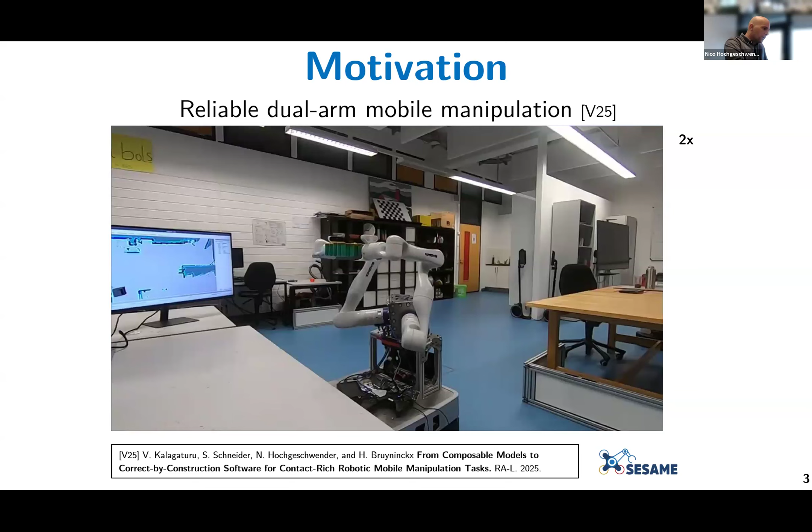Then it aligns to the table with the end effectors, and then lifts up the battery cells and delivers them to a safe place to finish the burning. So I think that's a nice application. We are all interested in this kind of application. But as you already saw in this scenario, this is, of course, not a real product. Possibly in the future that will become a product, but it remains in a laboratory situation. So we are in a laboratory environment where we have this low TRL.

TRL stands for technology readiness level, which was introduced by NASA many years ago to rank technologies and innovations and to have some maturity level. So is it fundamental research? Is it already prototyped? And demonstrating a method in a laboratory environment is better than nothing, but it's not yet the TRL which we want to achieve. And in order to demonstrate this low TRL, typically we would perform a single demonstration, maybe multiple demonstrations, but it is a single task, single robot kind of setting.

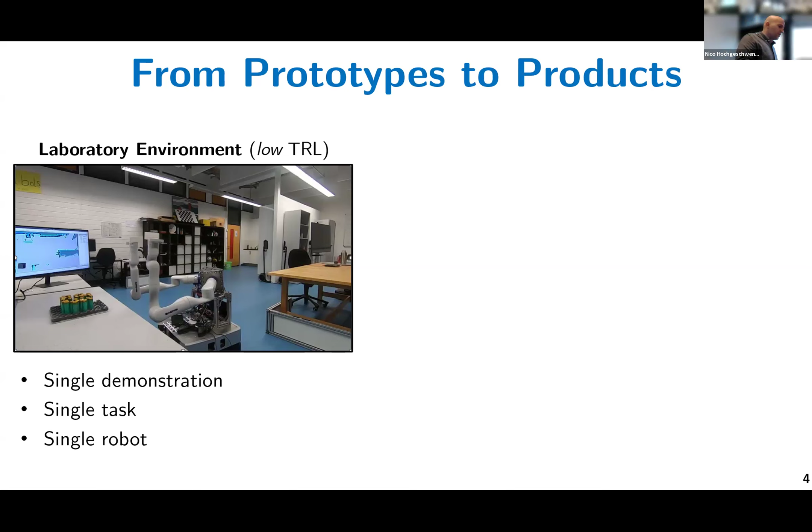But ultimately, what we actually want is to deploy the system into the field. So that we go into the real factory environment where, by definition, there are different constraints. That is the operational environment. So deploying the system into the field would imply that we have a higher TRL. But in such a situation, obviously, we are more interested in a higher maturity of the technology because we are thinking also in terms of long-term deployment.

So we want this robot to be robustly and reliably operating over a long period of time. That basically means that the service which the robot provides, namely lifting these battery cells and bringing them to a safe place, is constantly delivered. We are also interested in a variety of tasks and possibly also the collaboration or cooperation with robots and humans.

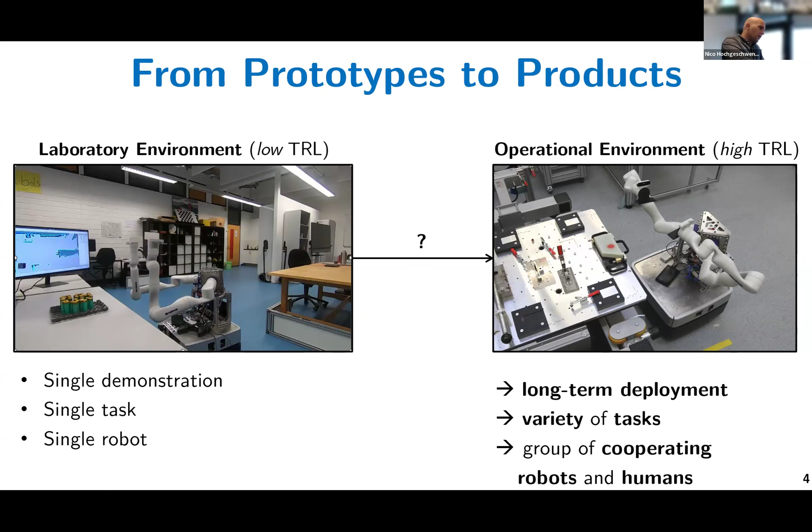And you see here, there's an arrow from the laboratory environment to the operational environment, and there's a question mark. And in order to answer this question mark, in order to go from this low TRL to this high TRL, we need to provide evidences, which are required to move from the lab prototypes into this reliable and safe setting.

Okay, but the situation is obviously that this is not one-way, one direction. It is, in fact, a very agile setting where we go from the lab environment to an operational environment and we actually go back. So this is bidirectional by definition, because in the operational environment, we will see that certain things are not working, certain capabilities are not rich enough, or even new technology which is not developed in our lab, but somewhere else, has been developed and needs to be integrated, and that would be the case where we would actually test this in a lower TRL setting.

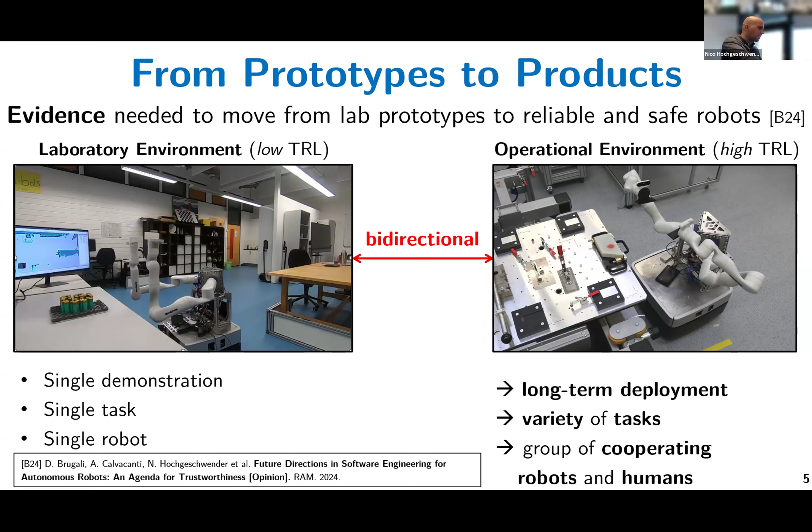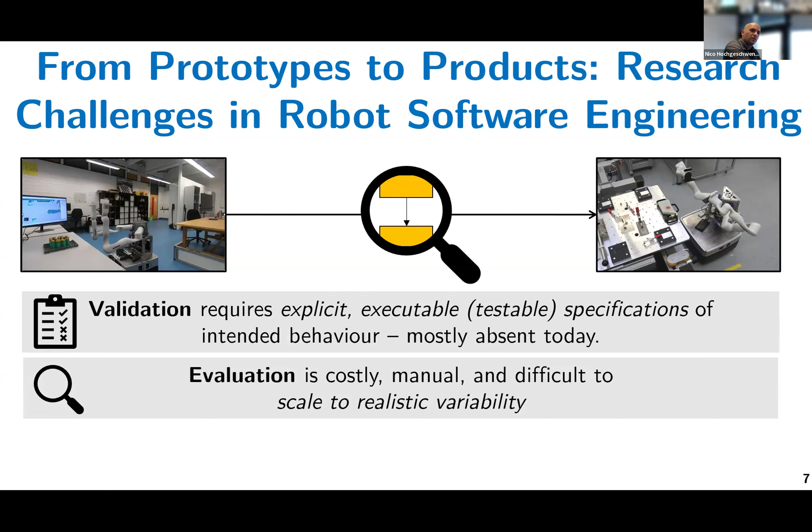The second thing is evaluation. We want to make statements about how good something is. And this should be exactly where we collect evidences and draw conclusions, and this is typically done through a lot of variability, different kinds of scenarios, different kinds of settings, where we can also draw some statistical conclusions. Because very often we have an assumption about how something will work, but just in the field, by trying it out in several configurations, several trials, we get a better understanding of that behavior.

And then the third thing is that these are important activities. This is also done. But in order to really scale that, we need to have automation in place. So we need to have automation which goes along the validation and evaluation cycles and makes these possible, that we have machines or setups where certain parts of this validation and evaluation can be actually performed in an automated manner, on the one hand due to the size and scale of the problem, but also due to the capabilities and resources which we actually have. So here automation is a key component to move forward.

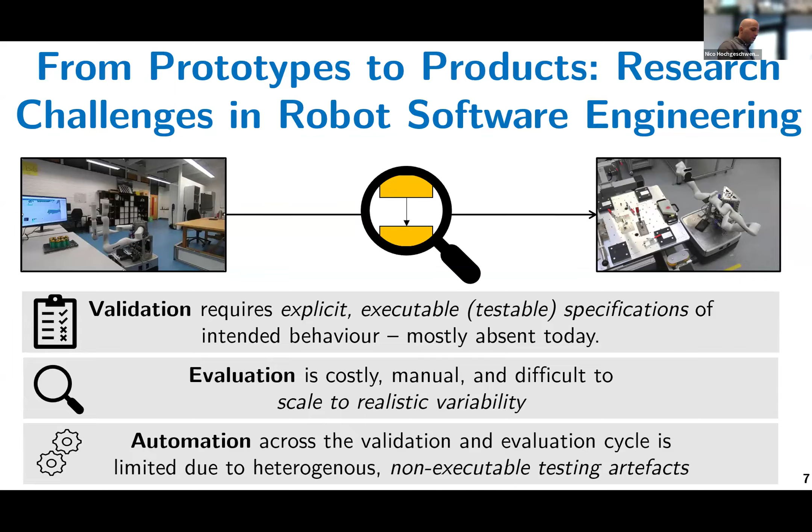Okay, having said that, let me now introduce you to an approach which we call scenario-based validation and evaluation of cognitive robots, which tries to provide a methodology to actually carry out this validation and evaluation in an automated manner. And to do so, let me introduce you to another real-world case study. So there was a time, there was COVID. Maybe some of you remember.

And in my former institution, we had a startup company developing mobile robot platforms, omnidirectional mobile platforms, as you see here on the picture. And of course, COVID also was a time of many opportunities. And there was the time where one thought that COVID is spread through contact infections. And as we know from other diseases, if you expose certain surfaces to UVC light with a different intensity, depending on the surface characteristic, of course, you can significantly reduce the amount of viruses and bacteria on surfaces.

So the idea for this company was to take their mobile robot platform, put some UVC lamps on it, and deploy such a system in public environments, things like healthcare facilities, nursing homes, kindergartens, schools, etc., to perform disinfection missions. So what does this mean? The robot is located somewhere in the building where there's a charging station. The robot navigates to a specific target location and then follows a certain disinfection route.

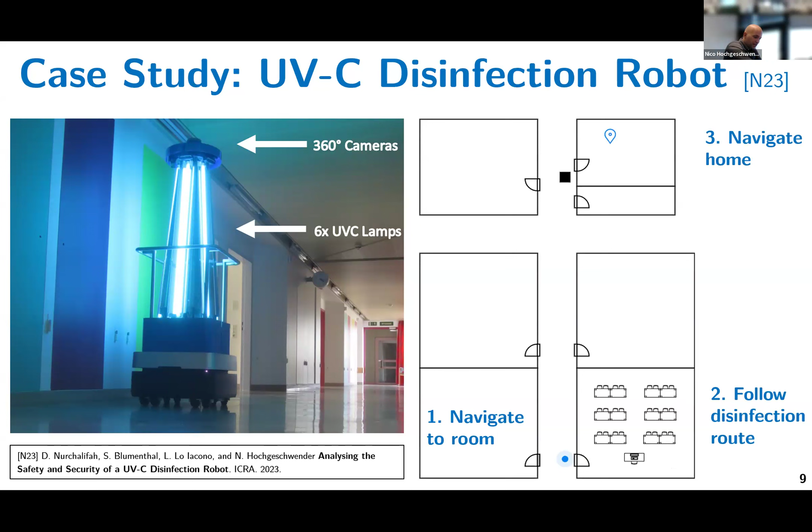So in essence, this is a rather simple waypoint following task, but of course the intelligent thing here is: how long should one stop at a certain surface and disinfect it? And then after this task is finished, the robot would navigate home. Okay, so in such a setting, we need to answer a very important question, namely, how do we know that this robot is safe to deploy?

And safety here has actually two dimensions. The first dimension is that UVC light is dangerous for humans. The idea is to deploy this robot in a human-populated environment, such as a hospital or a nursing home. The robot might operate just at night, but also during the day. If there are people around during the day, the robot should not expose the UVC light to humans, at least not for a very long period. So we need to make sure that there's people detection in place, and that we have mechanisms to turn the UVC lamps on and off, etc.

But then there's also a second safety-critical dimension that is rooted in the robot mission itself. What does this mean? The robot mission here is safety critical on its own, because there is an assumption that the robot is reliably operating in that environment, that the surfaces are to a certain degree free from viruses and bacteria. So we have a certain quality expectation about how clean that environment is, how contaminated it is. And that is per se critical, because we could then say maybe in such a setting it's fine that vulnerable people are walking around. And if this were not the case, then this would be very critical.

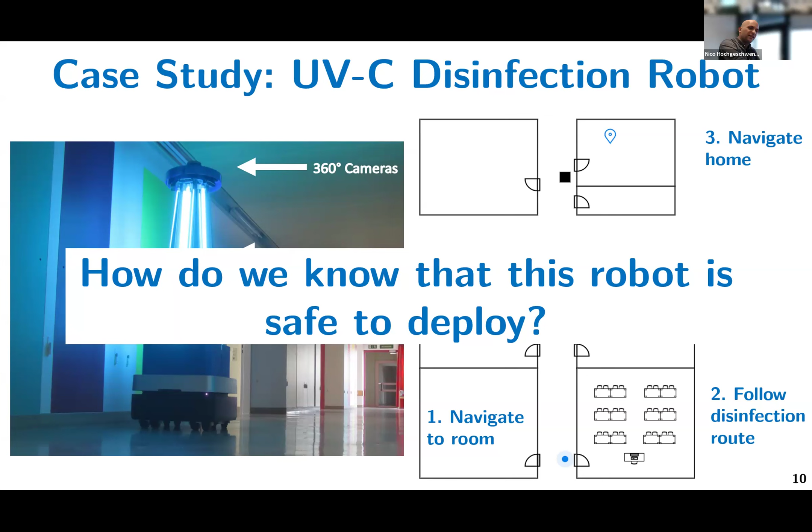Okay, so there are these two dimensions. So during the time when this company actually developed this robot, I observed a very interesting thing, which I thought would be an opportunity to investigate further, right? So the company basically, they were located in one of our labs at the university, and they had an environment where they actually tested the basic capabilities of the robot. So they basically came up with a test environment, which was a real laboratory environment, where they tested the different capabilities of the robot, the disinfection and the navigation and so forth.

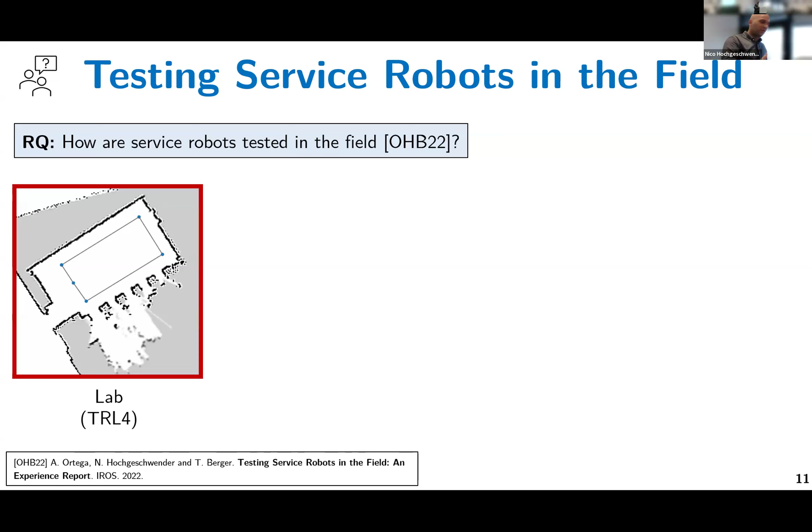And in a first starting point, they tried out certain missions in this small environment, and then at some point they wanted to go to the hospital, and the next step, which was in terms of scale similar to the hospital, was the ground floor of the university, which is a 7,000 square meter environment. And the small red box, what you see here, is actually where the laboratory is located. So we wondered, okay, how do you go now from this laboratory environment to this operational environment, and how do you test the robot really in the field? And apparently that is also a problem for other companies and settings.

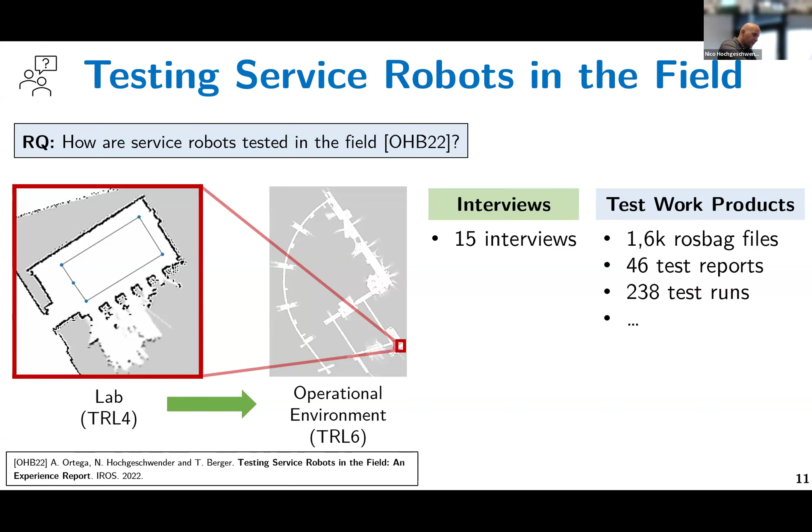So we did an empirical study. We performed interviews with robot software developers about their testing practices in the field. We looked into what are the actual test products which the developers produce. So we looked at the rosbag files, we looked into the GitHub issues, we looked into the test reports, incident reports, test runs, depending on certain configurations, and we looked into these test products. And we tried to identify what are actually the core challenges and what is the state of the practice in performing a field test in robotics. And we derived basically three things.

So what was quite interesting to see is that obviously, through the scale of the environment, it was clear that they cannot test in every location. So what they did in order to deal with this complexity was an explorative test case design. They employed certain partitioning algorithms in order to decompose certain parts, certain characteristics, into environments, and then tried to employ similarity measures like, okay, this looks very similar to another environment, so we don't need to test here again. But even with these ad hoc approaches to dealing with the complexity, there's a significant cost of the testing.

So first of all, from a rather practical side, there are very few means to perform manual traceability. What I mean here with traceability is going from the requirements really to the test results and seeing whether the requirements have been fulfilled. This should be done in a traceable manner, so that I can directly infer which of the requirements have been fulfilled, which have not, etc. And to which degree I have these requirements fulfilled, meaning how many test runs I have performed to test this specific requirement. And there's also a lack of real-world test inputs.

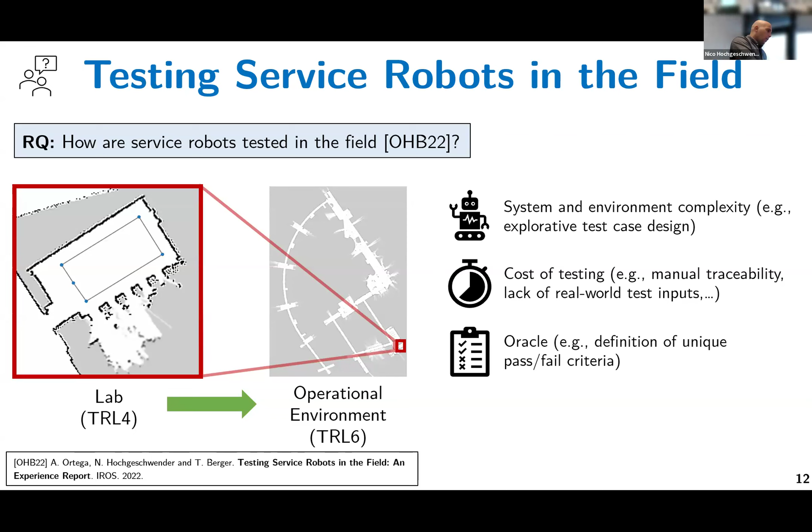And here again, human developer effort is actually required in order to come up with these oracles. And these oracles are in the end computer programs which check the test output for passing or failing. So these are things which still need to be developed by hand. Okay, so taking from this empirical insight, one idea now is that we say, okay, there are actually two dimensions in coming up with these test and validation campaigns. There's the one dimension which is actually the scenario.

So this is the outline, or if you look here on the right-hand side, this is the cover from Romeo and Juliet from Shakespeare. So if you take this analogy in performance arts, an actor would read this outline written by Shakespeare in that case, and it would be a synopsis of the play and a sequence of the possible events when imagined, and an author would write such a scenario, right? Shakespeare, or a robot developer, would actually come up with these scenarios. And then on the other hand, we have the actual agent which executes these scenarios. So in performance art, this would be the actor. But there's an interpretation happening, right?

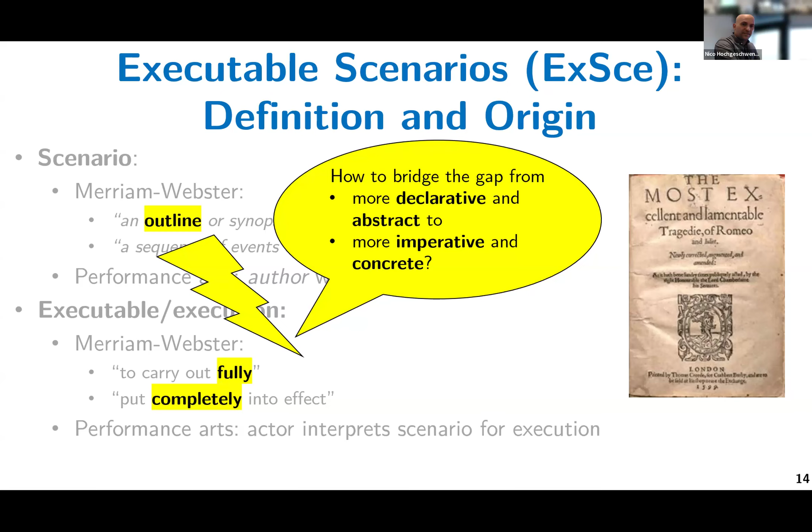So from this outline, which is more declarative and abstract, we have a more imperative and concrete thing. And we asked ourselves, is it possible to provide such a thing also for robotics, and specifically for testing robotic systems? And that is our executable scenario framework or methodology, which basically entails three stages. The first stage is the specification of these scenarios, which should be not only on the declarative side but also on the imperative side, meaning that they are executable. And these scenarios should entail at least three elements: information about the actor, the kind of play or the behavior in the robotic sense, and information about the environment.

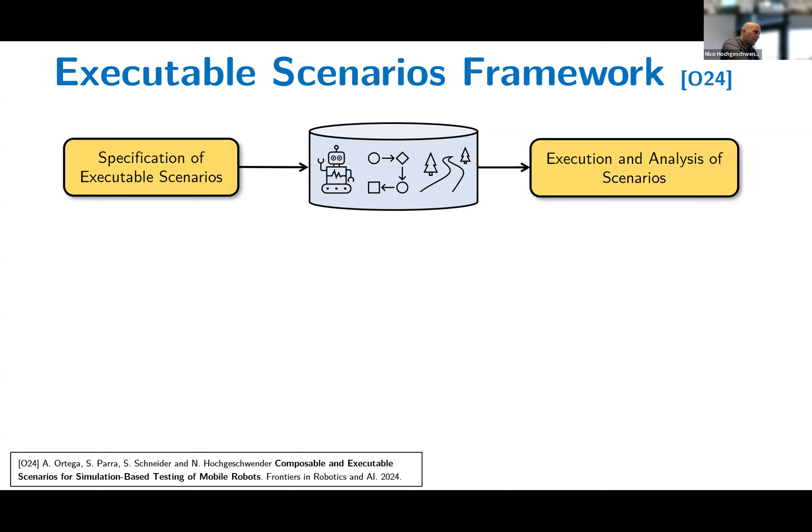And then we have an execution and an analysis stage. But just with the specification of the robot behavior and the environment, we cannot perform any analysis. What is then required are our acceptance criteria. So these are the specification of our pass or fail settings. And having that, we can then bring that together and say, okay, to which degree has this been achieved or not achieved?

And the third stage is then, if we take multiple, and you see this is a feedback loop here, if we have multiple of these executions, we might be able to draw conclusions about the performance of our robotic system. This is then the generalization stage, where we say, okay, we have performed these kinds of scenarios, we have observed the following behavior, and now these are the conclusions which we can draw from it.

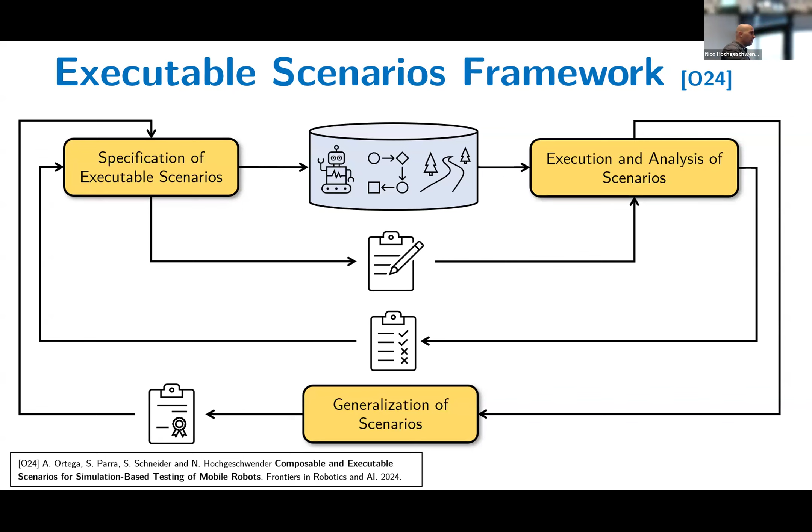Okay, let's have a look how this looks now concretely. I will provide an example from the case of specifying specifically the environment. By just specifying the environment, we can do already interesting things. So based on these interviews, we asked ourselves, how can we actually specify these scenarios? I mentioned already, when it comes to managing environmental complexity, partitioning the environment was another way to handle environmental complexity.

So the developers went to the environment and looked at specific characteristics, as here in the quotation. Characteristics of each area or room allowed developers to deliberately control the difficulty level. Meaning, maybe we start with very simple scenarios or environmental models, and we progressively increase the complexity. In order to do that, there's a specification step, and we developed a domain-specific language. This is our floor plan domain-specific language.

This is a declarative specification language specifically for mobile robots operating in indoor environments. It gives a developer a means to express their environments in a very declarative manner. Having such a model representation, we are then able, through model-to-model generation, to automatically generate artifacts which are necessary for automated simulation. These could be, for example, 3D wall meshes or grid maps, which can be used by the navigation stack of a mobile robot system.

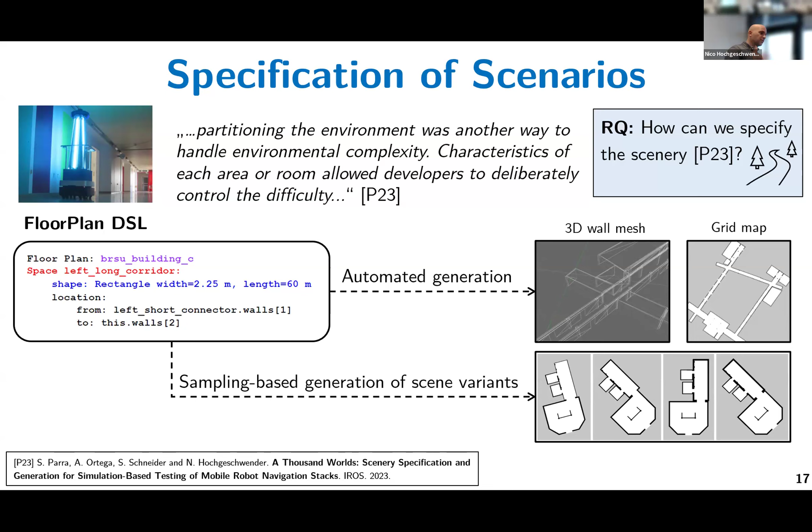We start with a base environment, a base specification, and we can then vary the attributes of certain concepts, but also the composition of concepts. A composition could be, for example, a room next to a room, which is possible in the grammar, and with the sampling approach we could define certain distributions or limits of how many rooms should be next to each other, or to which degree the room is rotated, or the wall width shown in the darker lines. So starting from such a base specification, we can automatically generate more advanced variations of this basic model.

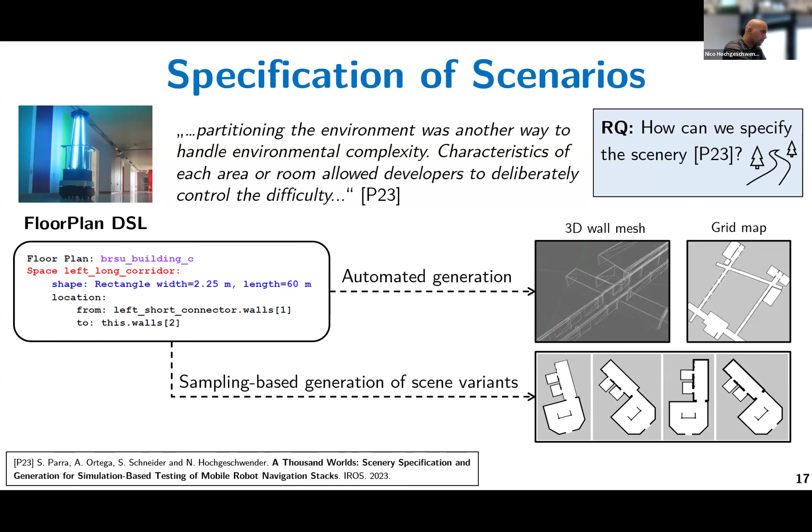Okay, how does this look? On the left-hand side, you see the floor plan concepts which are available. These are rather few concepts. Free space, which is surrounded by walls. Then we have dividers and entryways, which can be interpreted as entryways from one room to another, or windows.

Underlying that, we employ standard geometrical semantics in terms of coordinate transformations, which you all know from TF. Each of these concepts has a location, which is described as a pose, and through pose relations we can then attach different space concepts with each other.

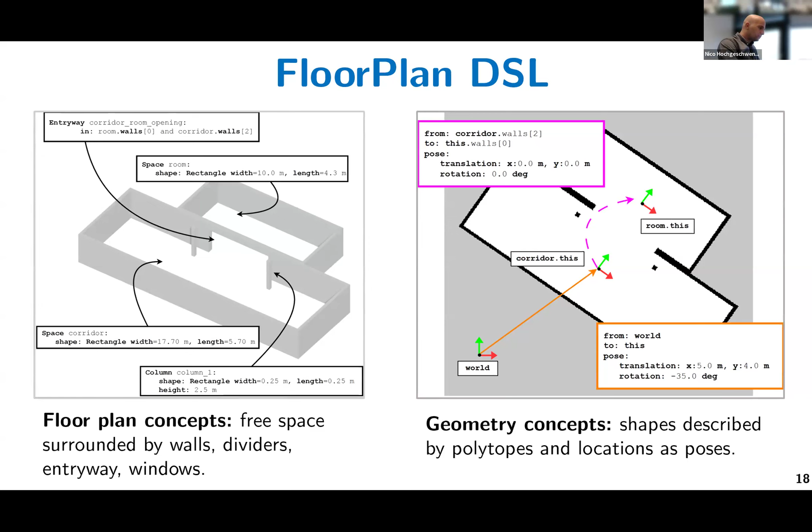Going now from these specifications, we want to actually automatically generate these simulation artifacts or assets. So in the background, you would start as a developer with specifying your environment with this floor plan DSL. You would generate variations, or you would generate just one representative environment. And this is just the front end. In the background, there's a knowledge graph representation, which you can also query.

And this is the representation where we then also generate simulation artifacts such as Gazebo world models for different simulators. So we are currently also supporting or working on supporting Isaac Sim and other simulators. And this is all based on the knowledge graph concepts available in our tooling.

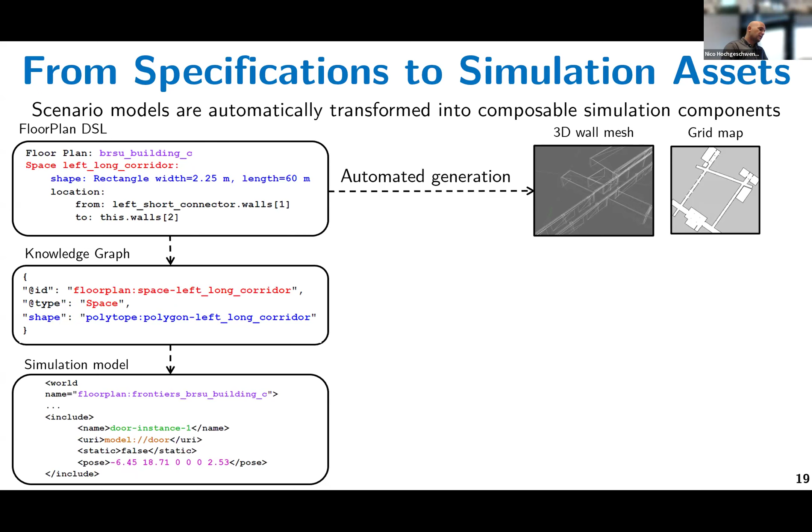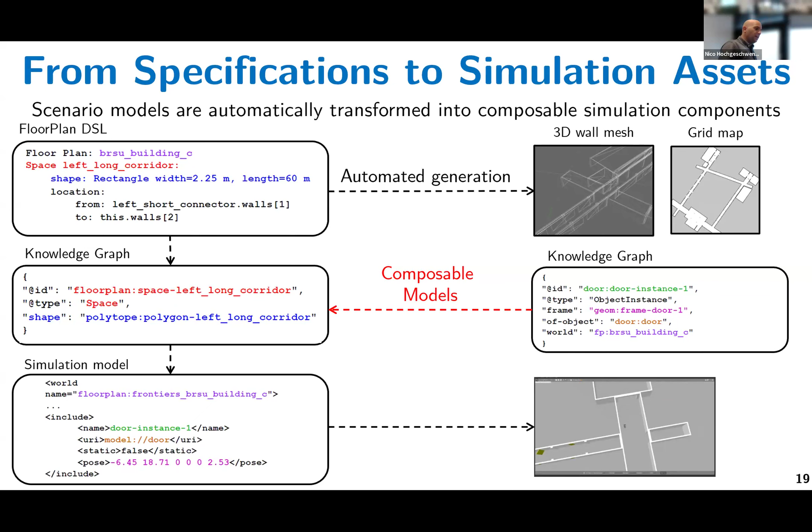The nice thing is that this allows us not only to generate executable artifacts, but also to compose new concepts. So for example, a concept about an articulated object, such as a door, would basically also operate on the pose concepts, which I have introduced before, but would then be a very simple model, which can be arbitrarily composed into an existing floor plan model. And this is how it would look, for example.

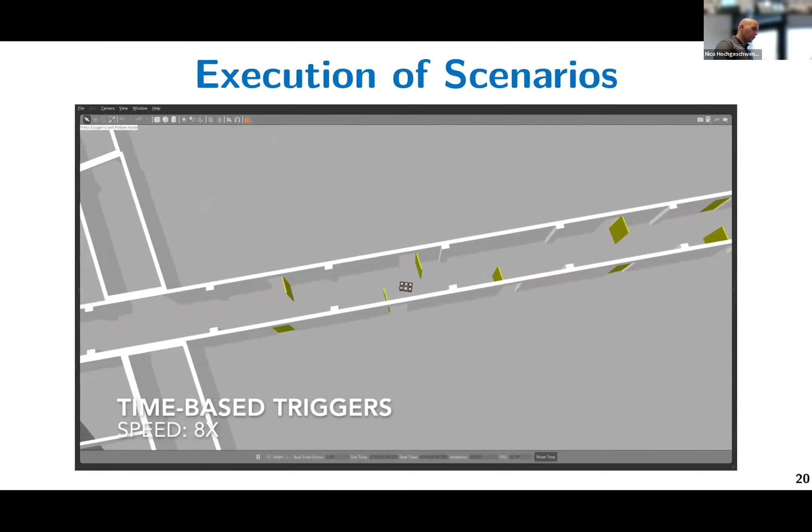So in that case, the robot is just driving through this corridor, and attached to these doors, there's a timing behavior, not related to the robot in that case, where the doors are opening and closing, and the robot needs to avoid that. And that is just by injecting one of these doors, doing quantifications over all of these entryways, and then automatically injecting these articulations into the environment, not by manually putting those things into the environment.

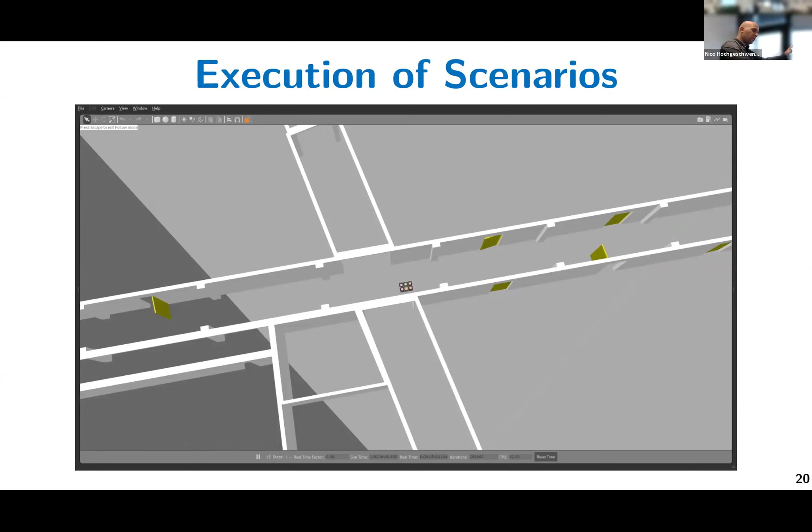What this also allows us to do is to infer higher order relationships between the robot and the environmental features, because this is actually what we are interested in. We are interested in how the robot reacts to situations in the environment. This is a very important thing, and this could be either humans or articulated objects such as doors. And by having this in the knowledge graph representation, we then have a higher order relationship, which basically looks at where the robot actually is, and where, in that case, the door is.

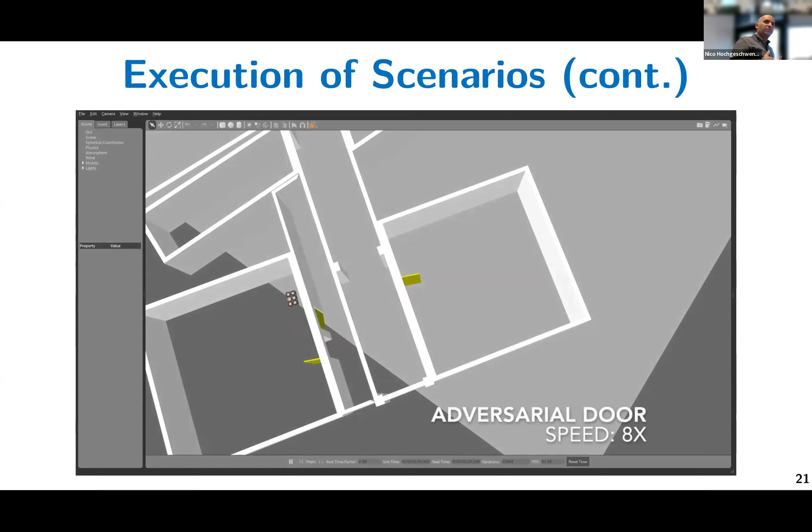And I give you an example here. So on the right-hand side, you see there's a robot in one room, and the task for this robot is to go to the other room. And the other room has two doors. And depending on the navigation system, it will make a plan to go through one of the doors. And in that case, you will see that the first door the robot is approaching is an adversarial door. So it is smashing right before the robot tries to enter the room.

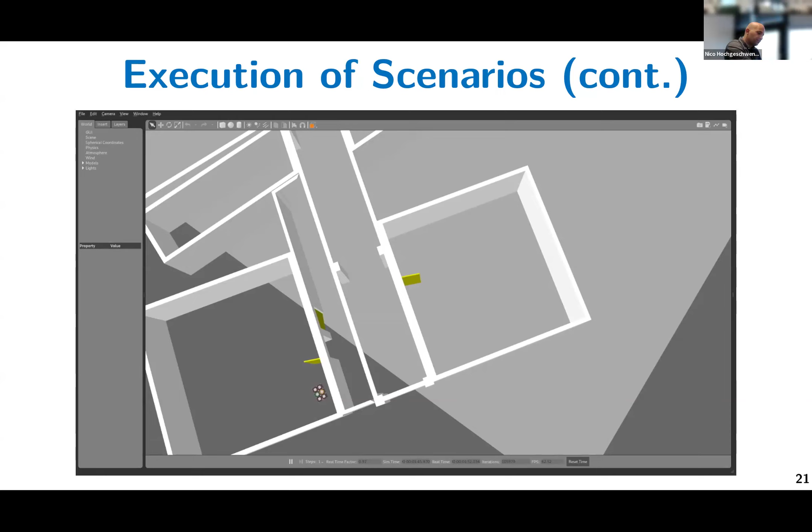And that is achieved through having both a model of the static environment plus the articulated object and the robot, and then being able to actually compose various situations. Okay, so fine, but what does this actually allow us to do now?

Looking at our methodology here, we are able to execute these scenarios, but what we actually want to infer is what the actual acceptance criteria are. When do we know that this specific robot behavior, what you just saw, for example, with the smashing door, is acceptable or not? And this is something where you can try out many different case studies, and I'm going to show you some of those.

I have to admit, if you are working in the field of mobile robot navigation, these insights are not completely new, right? But this now allows you to actually check and validate upfront and be ensured that this is actually also happening in a specific environment, and to learn about the limits of your system. Okay, so that is the question. In order to do that, we need to have the execution in place, as you just saw.

Okay, so let's start with one case study. What we also found out in the interviews was that developers said, normally we first try to develop in a simulator with a recreated model of the target environment. Okay, good enough. But in some cases, this is tedious.

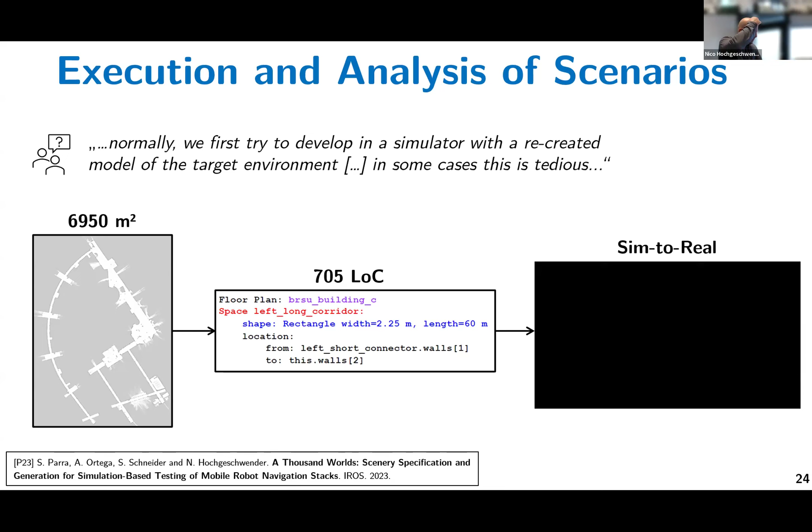And this is nice because we can then use this representation and the generated artifacts to do some kind of sim-to-real test, where we let the robot operate in the real environment, but with the map which we have generated, and vice versa. So this is a nice way to then test this gap.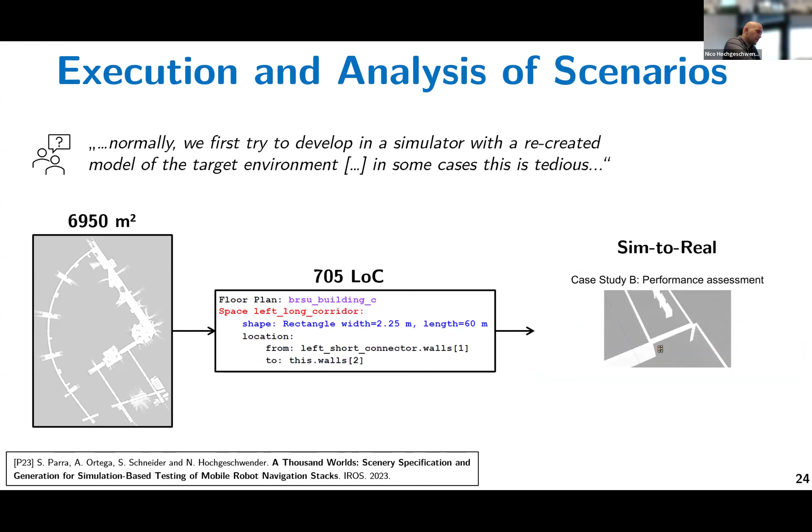Another situation was when you look to the quotes: the worst possible case is a long corridor with repetitive, few distinctive changing features. So this was a quote which we took from the interviews, and we drafted a scenario where we said, okay, we want to have a very repetitive and boring corridor. So with our FloorPlan DSL, it is possible to say, okay, generate me now corridors of arbitrary lengths, for example, starting at a certain length until another length.

And in one of those scenarios, we identified a buggy situation, namely that the Nav2 stack underlying uses a Dijkstra path-finding algorithm to calculate the path. And one of the parameters for the path planning function is the maximum number of cells to be visited before returning the path. But this value is actually hard-coded to be 4 times the number of cells in this created occupancy grid map, and this along the x-axis.

And if a path is not found by then, the function returns an empty path. And this is exactly what you see here. And we identified that bug. In fact, this was an 8-year dormant bug in the move_base local planner. And to validate this, if you just do a coordinate transformation where it's not along the x-axis, where you just switch it, then a path is actually found. So we also made, I think, a bug report to overcome that.

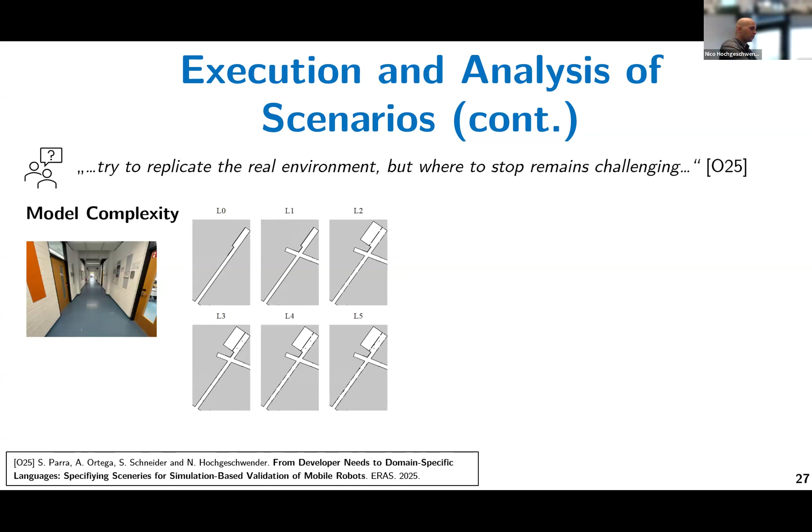If you take this real environment here on the left-hand side, then what you see in the grid maps, I think it's hard to see, but there are various levels of complexity or feature richness of the floor plan model. You can then systematically test the level of complexity you would like to introduce into these models, and relate that in a simulation campaign, for example, with the error and the variance of the pose estimate in each of these different environments. And then you see, for example, that in the first one this is rather high compared to the others.

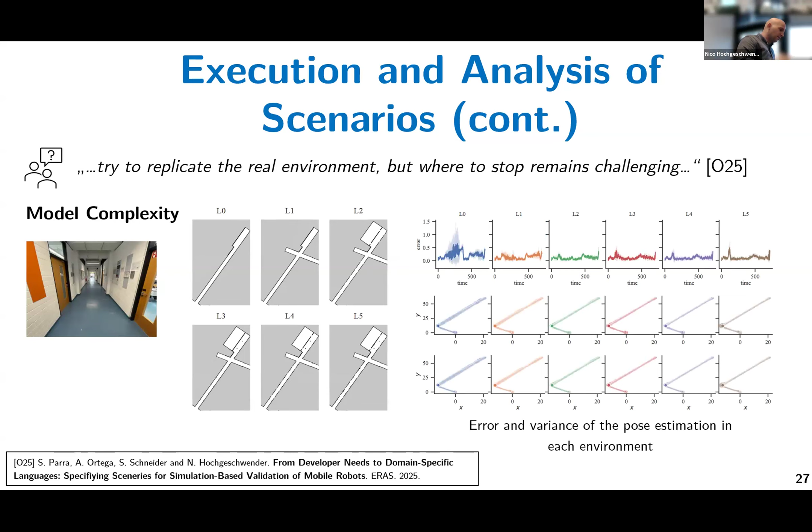Okay, so this was now the case where we do not know the acceptance criteria. This was more in the context of investigating the evaluation part. But there are situations where we actually have a priori defined acceptance criteria, and these sometimes come from robotic standards. What you then want to do is check whether your robot conforms to these standards. That is what is called a conformance testing approach, or adherence of a system to a standard.

What you would basically like to do is say, okay, given a certain robot, I have a requirement: the robot shall adapt locomotion based on a certain terrain type. If you then look to standards, which kind of standards are out there and which of them actually define an evaluation protocol, that basically means how to actually carry out this conformance test, right? The one thing is that I need to adhere to a standard. The other thing is a procedural specification of how I should actually carry that out.

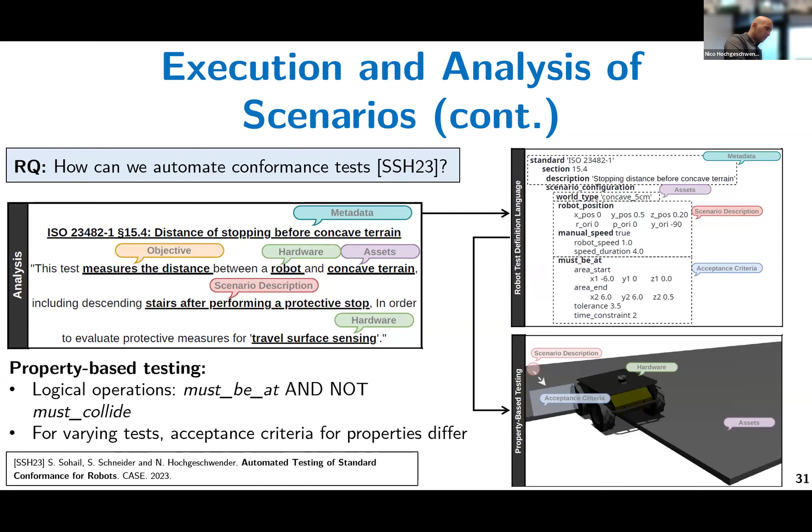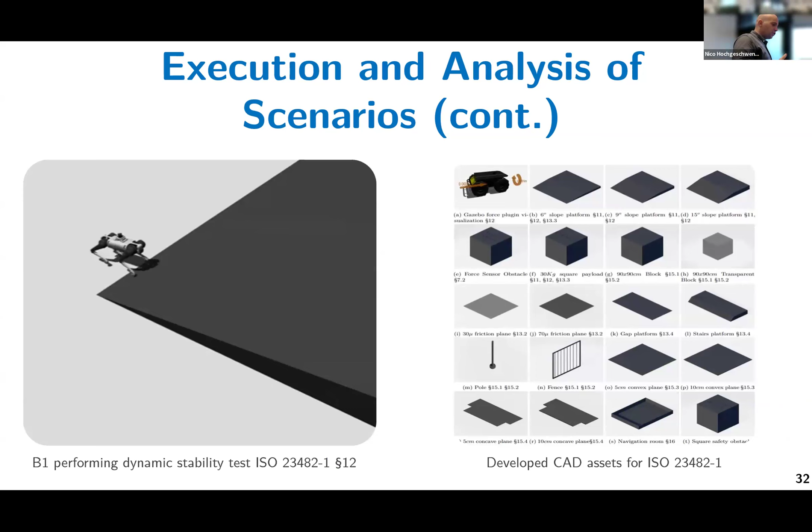And then for the varying tests, of course, the acceptance criteria for these properties differ. So these are then the safety margins which we want to consider. These need to be adjusted, obviously, for your specific test case. And the tooling allows us then to perform tests like what you see here on the left-hand side with different robot configurations, different robot systems, but also certain assets which can be shared among these different test situations.

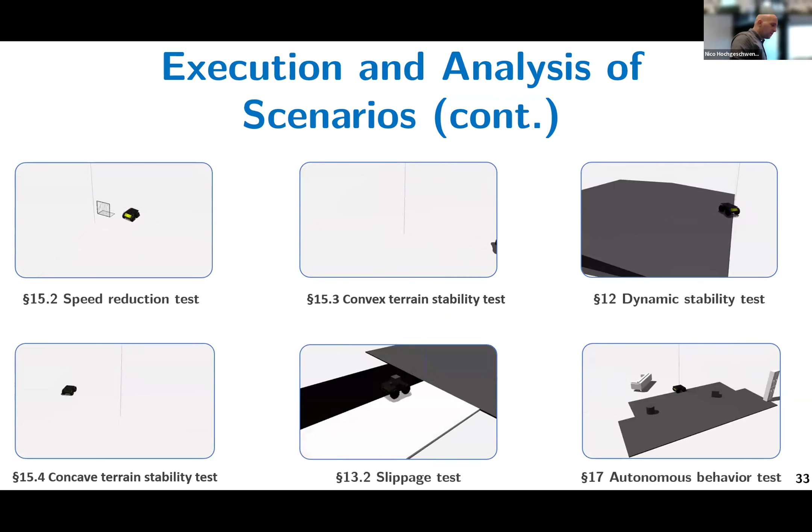We tried to realize the majority of these tests, from speed reduction to stability test and so forth, with varying robots. And in fact, for one of these robots, a Jackal robot, the dynamic stability test on inclined surfaces revealed a defect in the driver, when you restart the test. This only appears in software. We tried it out also in hardware, and surprisingly it's not appearing, but in software, at least for this version, the expected behavior would be that the robot moves to the right-hand side, but the actual behavior is to move to the left-hand side, and this is due to a bug in the reset mechanisms of the driver software.

So this is, I think, a nice approach to automate these tests. Of course, this has also certain limitations, specifically that there are obviously certain tests defined in the standard which cannot be automated. Then there are also limitations of the simulation which need to be considered, like fidelity and so on. But it gives at least already a good indication what are the things I should focus my development on.

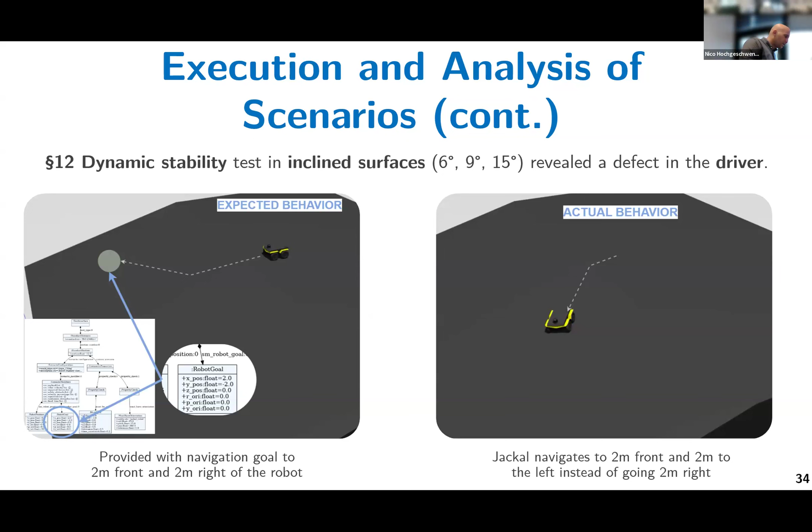Okay, let me come to another topic. What I just showed you now was the acceptance criteria which are derived by standards. But what about acceptance criteria which are application specific? So in fact, you want to develop your very own application, and then maybe you do not want to, or you do not bother to conform to standards. What would you then do? And then you need also a way to express those.

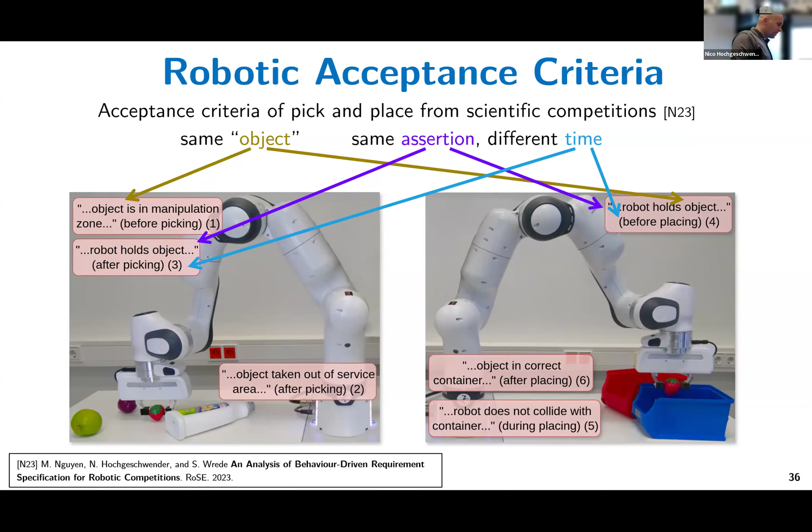And this is a structure which you can find all over the place. This is for robotics people not new. But current testing approaches do not compensate for exactly that. So what we developed was, again, a specification language which allows us to specify such acceptance criteria. And what does it entail? So first of all, it is based on a testing methodology which is called behavior-driven development. Maybe some of you might be familiar with Gherkin. So this is one of the representative syntaxes. It is used in software, web development, etc.

But we looked at those specifications, and as I exemplified with this example, they are not rich enough to capture robotic scenarios. So what we introduce here now is an explicit timing specification in the form of fluents. So predicates with the time information. Such a thing is located at the location. Is the robot holding the object? Is the object released, etc.? These are things which we can express in these fluents.

And then the BDD basically has three stages. The one is a given. So given a certain configuration of our scene, of our environment holds, when the robot is actually performing and carrying out a specific task, then a certain fluent holds true. If you are familiar with PDDL, for example, this is a bit like a pre and post condition kind of representation, but here now combined in this BDD kind of framework with this fluent representation.

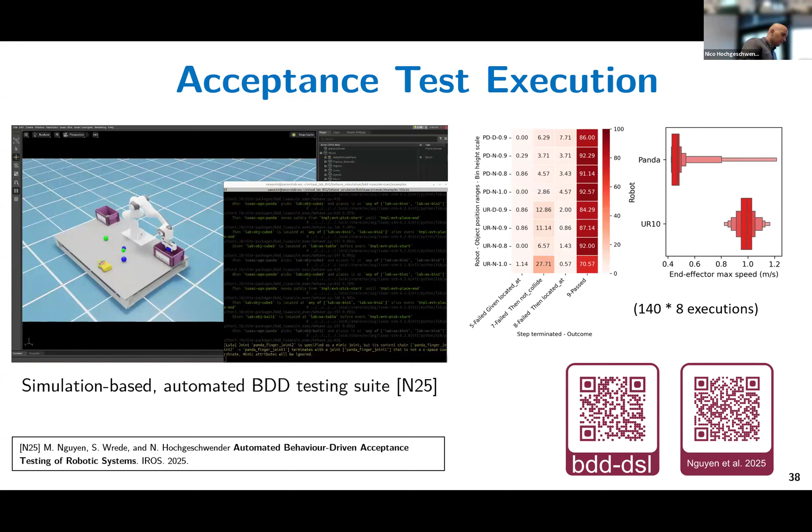So this is our simulation-based testing suite. We tried this out on various pick and place scenarios, also object sorting scenarios, and then for different robots in different configurations, checking certain pre-built controllers in Isaac Sim. But we are now moving also to the real robot to validate certain other kinds of configurations.

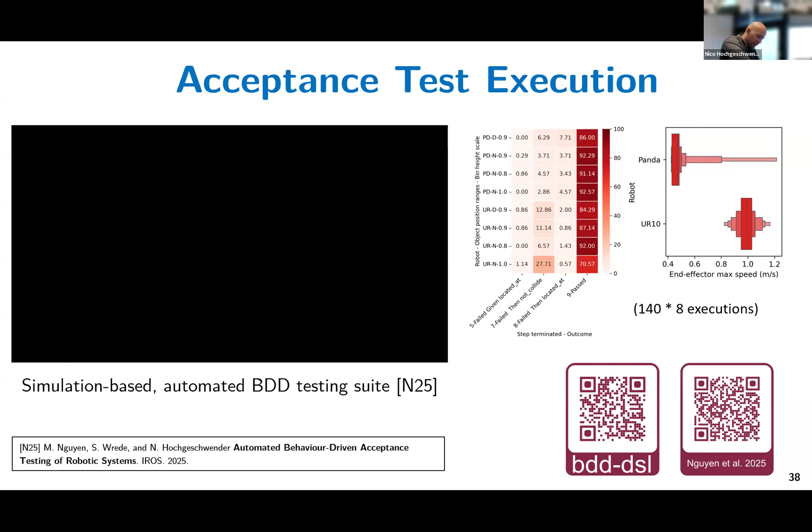What you see here on the right-hand side is, for example, the fluent regarding the end effector maximum speed and how it varies among the UR10 in Isaac Sim and the Panda for different workspace configurations. Workspace configuration here means table height, the boxes, object sizes, etc. All of this is also freely available, so if you want to try it out, please do so.

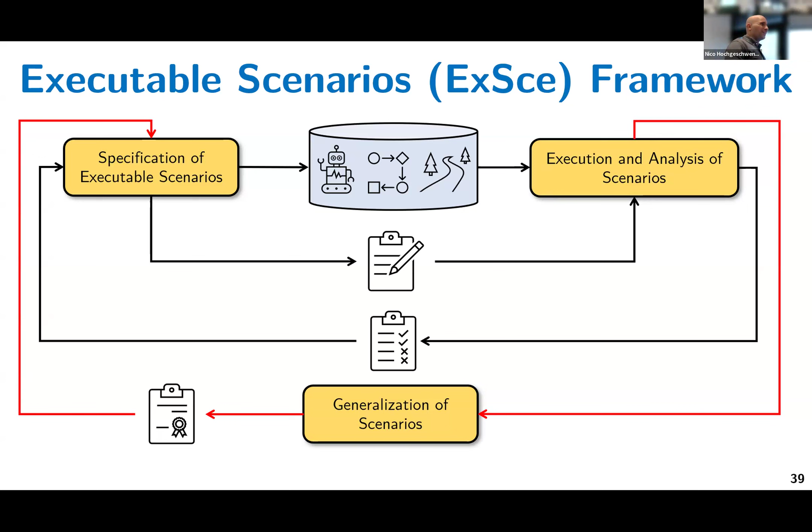Okay, last but not least, I would briefly talk about the generalization aspect. I think in the generalization stage, it is important to consider what are the actual insights which I can learn? How can I generalize over a certain validation campaign? And this is, I think, important in order to come up with new benchmarking scenarios, and benchmarking scenarios which are by definition stakeholder aligned.

Because we want to compare real systems on established benchmarks, but how do we come to these benchmarks in the first place? This is also a question we need to answer. I think one method is to actually use this methodology to derive benchmarking scenarios. And these are, quote unquote, complete evaluation plans. So generalized scenarios would be complete evaluation plans which cover a certain set of variation in the environment, tasks, and so forth.

But here we are not yet on the level, at least for real physical systems, that we have these evaluation plans being carried out in an automated manner. This would really be, I think, the holy grail, so to say, if we would achieve such an automation in the real setting. But what we can already do is use those evaluation plans, for example, as meta descriptions for data sets.

So if we want to have a justifiable selection of a data set, in the context of this metrics project, we did this for handover scenarios and failures in handover scenarios, which were defined in these evaluation plans. So then this becomes a representative data set. And the decisions why certain features have or have not been considered are then expressed in these evaluation plans. This gives a bit of transparency to these data sets and where they actually come from. So I think this is an important step to make.